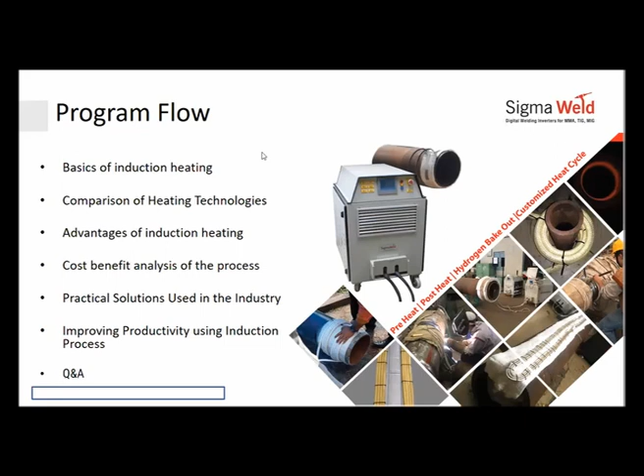So what is induction heating? Induction heating is an accurate, fast, repeatable, efficient, non-contact technique for heating metals or any other electrically conductive material. Simply put, if you remember your childhood days when you played with a magnet, it's just like that. If you had a magnet in your hand, as long as there was no metal around it...

Let's dig into the history of induction heating. Michael Faraday is generally credited with the discovery of the fundamental principles underlying induction heating.

Initially, it was a problem child. Everybody was doing research on induction to find out how to reduce its effects. The effects were causing problems in devices like transformers, motors, and generators, where they had a lot of winding of electrical cable on top of a metal, and they were causing other parts to get heated, making the overall process inefficient. So a lot of focus early on in the 1790s and 1830s was largely on the reduction of impact of induction rather than use of it.

Then they realized it has so much power and opportunity that they could use it to do many things, including melting metals. So the initial start of induction was around 1916, where they began using induction for the possibility of metal melting. Early applications were melting small charges of metal using spark gap oscillators.

Spark gap oscillators - most of you would remember your age-old radios or transformers, and you could have seen a bulb kind of device there. That was a spark gap oscillator, and vacuum tubes. They also used induction heating to heat metallic elements from vacuum tubes, to drive off absorbed gases prior to sealing the vacuum tube. Again, you could heat it with non-contact from outside, and thereby do that without having anything get inside itself.

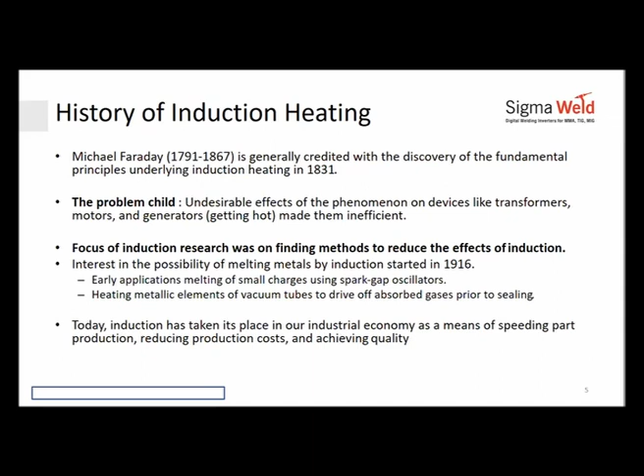It all began with Faraday's law. So what was Faraday's law, and what does it say? Basically, magnetic flux exists, and in Faraday's experiment, they realized that a steady magnetic flux doesn't do anything.

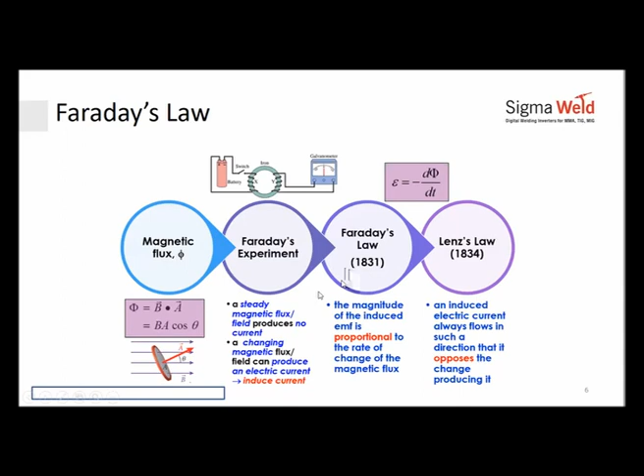But if you kept changing the magnetic flux, it had a very positive impact of inducing an electric current on the object. The magnitude of the induced EMF, electromotive force, is proportional to the rate of change of magnetic flux. Now what this meant was frequency, and what this means is the current induced. So this is just to explain the key factors that go into induction and how it all came about.

If I had to explain this in a very simple term, most of us today have seen an induction cooktop, so I'll take that example to explain the principle of induction heating. You would have an induction coil placed below the surface, and on top you would have a glass or toughened surface or plastic surface, which is non-metallic. You would have the coil designated - this is the coil, which is copper wound in circles over here.

These inductive coils in the cooktops typically operate at frequencies of about 20 to 40 kilohertz, which means that is the frequency at which the magnetic field will also be generated.

These are the blue lines that you can see the magnetic field being generated. Now, if you switched on your cooktop and put your hand on it without any metals on your finger, you would not feel any heat, right? Because your hand doesn't conduct, there is no impact of magnetic field on your hand.

But if you put a metallic vessel on top of it, when you added water or anything to it, the vessel would now be in the path of the magnetic field. Now, this magnetic field, which is an alternating magnetic field, would induce current in the metal. And this orange zone shows that the metal will start getting heated up quickly. And since the metal starts getting heated up, it conducts the heat onto the object inside the vessel, that is your water, milk, tea, whatever you wanted to boil or cook. That's the basic principle of induction.

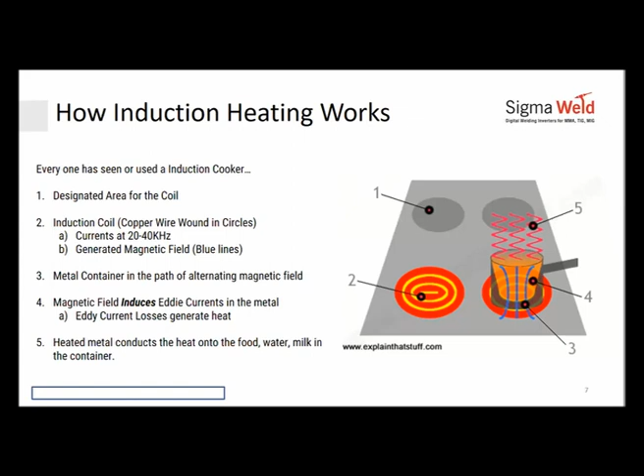Important things to consider when we look at induction. One of the most important parameters is power. Now, power is current times voltage. So which current are we talking about? The current that is flowing through the coil that is generated, the alternating current. That determines the intensity of the magnetic field generated.

The frequency of operation of the equipment decides the length of the magnetic field, or the depth. So the higher the frequency, the shallower the penetration or the heating effect. So if you want to do case hardening, typically, you would be touching only the surface. When I talk about high frequencies, I'm talking about anything over 100 kilohertz. Above 450 kilohertz, you would consider it to be radio frequency. And that would give you really fine case depths.

If you lowered the frequency, you would see more deep penetration, or more heat going internally. And when you do it really low frequency, you would be doing something like forging, where you want to heat the billet completely inside out, or you want to do through hardening. At that time, you would be operating your induction heaters at a very low frequency, maybe 150 hertz, 500 hertz to about 1 kilohertz. That would help you do that.

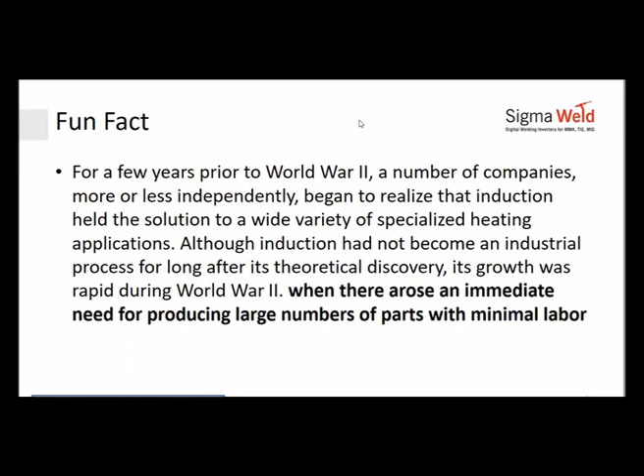I guess I wouldn't call this World War III, but we are in a situation right now which is very similar, where the time available in the year is going to be much lesser than the amount of work we would have on our hands to complete, which has begun as of now. So induction can play a good role for you to speed up things as we move along.

Now let us understand the kind of application range that you can do with induction heating. So here are a few examples. Hardening is one of them, whether it's case hardening or through hardening, you can do hardening with induction.

You can do annealing with induction, bright, black, wire annealing. You would have normalizing, if you wanted to take the material to a temperature just below Curie point and hold it there so that whatever stresses were there were relieved.

Then you could do stress relieving, pan bottom brazing. All the vessels and utensils you use are also annealed so they can be shaped without cracking. Pan bottom brazing is used for all the pressure cookers you use, which are either impact bonded or pan bottom brazed.

There is a sandwich brazing between the inner vessel on which you put the food and the base which goes on top of your stove or induction cooktop. A flat layer brazed in between both of them is a layer of brass and alloys which forms a permanent bond between the two layers. That's pan bottom brazing or impact bonding.

Then you have resin bonding. Every time you use pipes, oil and gas pipelines going underground need to be coated with a layer. If you see that black layer, that's resin bonding.

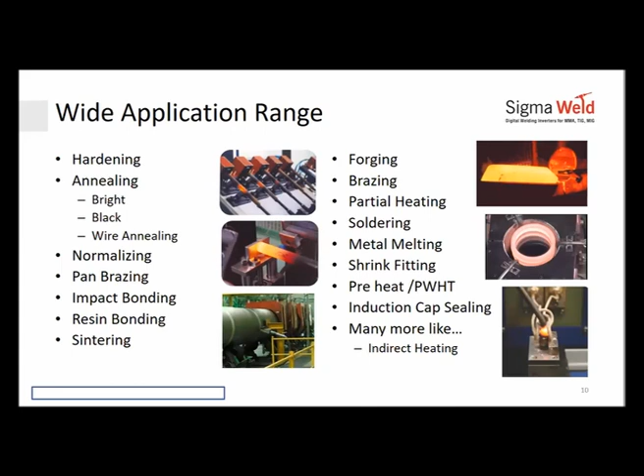Some of the features you may not be very clear are induction-based, but I'll show you how.

One example is induction cap sealing. If you've been taking any medicines, nutraceuticals, lube oil, lubricants, or food packing like Bournvitas or Horlicks - anything that has an aluminum foil on it has been sealed with induction to a large extent. In induction, what happens is it's an indirect heating.

We heat the aluminum foil under a tunnel. When it gets heated, it melts the wax on top of the foil and releases it from the board that is holding it. Because it's pressed firmly against the bottle, the soft poly layer below the aluminum forms a hermetic seal. Induction speeds here can be as high as 300 bottles a minute.

You can look at something like a carbon water filter cartridge, which is there in your water purifiers, whether RO or whatever you look at. This is a carbon filter, but on top and bottom they need to put plastic caps. Now, how do you put a plastic cap and let it stick there?

They have to do a hot melt glue. How do you apply glue and put this together at the speeds of production you're looking at, maybe 120, 200 pieces a minute? It's very difficult to do with a general process.

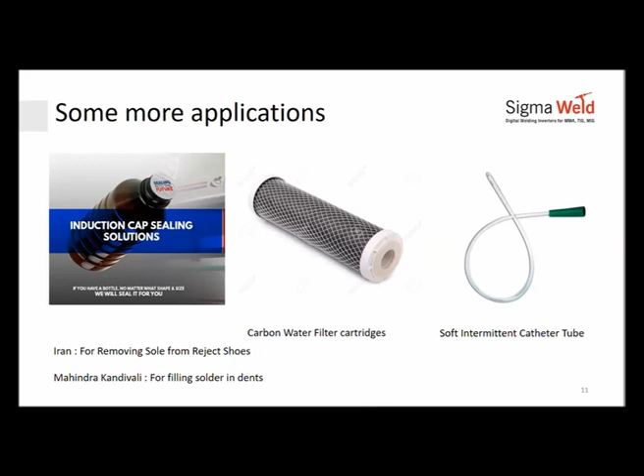Okay, so moving along, if we have to compare between the technologies - can I have a quick poll in the meantime so that we see everybody is still there? Can we look at this before we do the comparison?

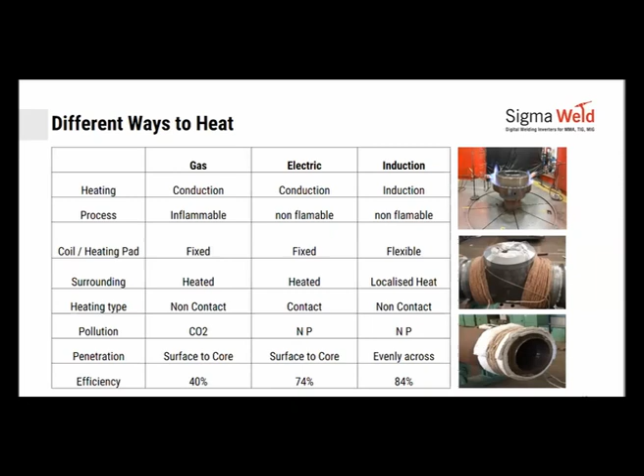Different ways to heat. At this moment, you may be using one of these three methodologies to heat: gas, electric, or induction.

If the heating process is gas, it is conductive - you are throwing flames onto the job, the job is rotating, and it's heating through conduction. With electrical, similarly, you wind the job on top, the nichrome wire gets heated, and the heat from the nichrome wire is then conducted onto the job. To avoid any loss of heat, we then wrap this with a layer of Cerawool.

In induction, the heat is not actually conducted, it is produced into the metal directly. The gas process is flammable, this process is not flammable, and even induction is not flammable. So from environment, health and safety point of view, or shop floor compliance and safety norms, both these processes are much safer.

In terms of coil heating pads versus gas-based heating or nichrome wires, the flexibility available on the coil or heating pads is less - you have a fixed shape along which the flame is thrown, the nichrome wire is wound, or the pads are placed. Whereas in induction, you have a flexible coil, so you have the flexibility of wrapping it around any shape you like.

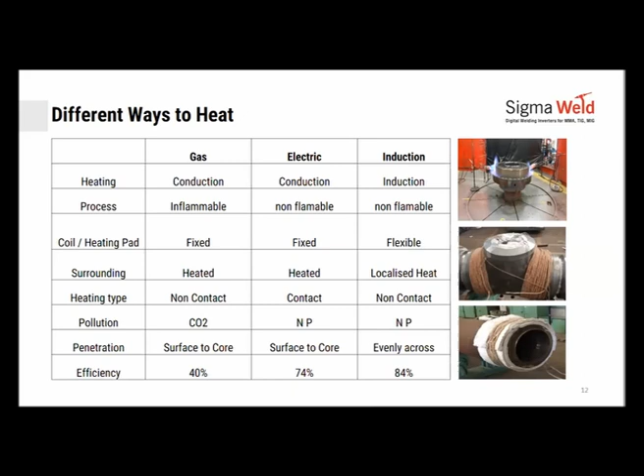Process advantages of induction: as we've seen, it's a very clean technology, no pollution, no flames. It's much faster and more consistent heating. As the heat is directly induced into the metal, there is no conduction loss. It's a non-skilled process - once you put it on and press a button, it heats on its own, repeating the same each time, with no skill dependency. It's highly efficient, and localized heating is possible - if you wanted to heat a very small portion of a large component, you could do that and take it up to normalizing temperatures or even beyond the Curie point.

Quick setup, so the coil doesn't get hot. The operator can place and remove the coil very comfortably without having to be worried about hurting himself. The welder can weld while the coil is in place, which is another advantage.

Your rotations can happen since it's non-contact. The welder can be welding while your heating is still on, and the heat is not impacting the welder. It's economic, because low power consumption reduces your cycle time, your overall setup plus heating time, and it's excellent for preheating.

We'll see a lot of examples following through, and it's also pretty much required for the P91 material.

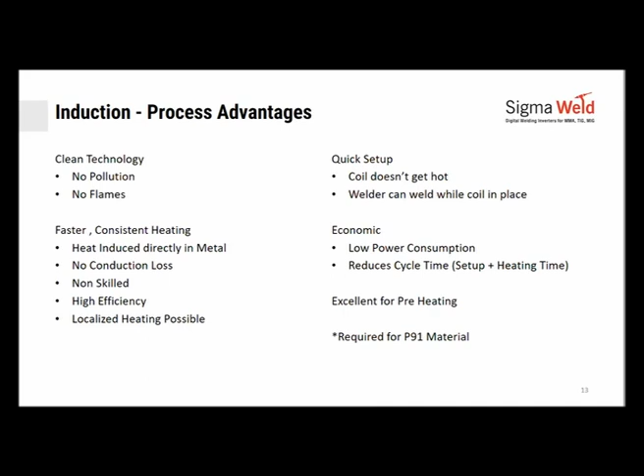How does it work? Here's a block diagram of an induction heating equipment or controller. You would put in a temperature profile that you wanted to achieve. Say, for example, you want a ramp rate of 50 degrees and you want to do about 600 degrees of peak temperature. You would set that on your profiler, which has an error amplifier, an amplifier, an inverter, and then the sensors.

This is your actual job, the pipe. The spiral thing here is your inductive coil, and it would have a thermocouple or sensor placed onto the pipe. This feedback would go to the amplifier, and it would check whether your desired temperature has been achieved or not. If not, it would amplify and allow more power to be pumped to the job. If it has already reached the rate you wanted, it would reduce or hold on to it. So this is the kind of feedback involved.

It works in a very closed loop. You can have a temperature feedback system, and you can also work in open loop. An accurate PID control loop has been added, giving much better control on the temperature profile. For inner loop power control, a PI loop has been added, so accuracies are under 10 degrees temperature difference between the outer and inner surface.

We did certain experiments on plates and pipes as thick as 250mm, and found that even over a period of time, the temperature difference keeps going down and stays below 10 degrees. On smaller components or lower thicknesses, we can achieve a very good temperature gradient.

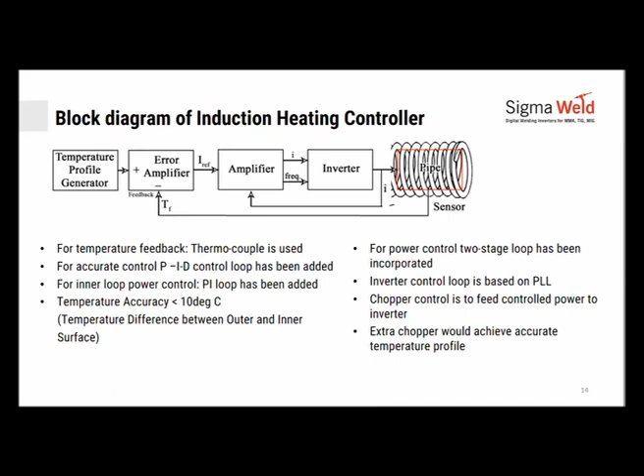For power control, a two-stage loop has been incorporated so you have much better control. The inverter loop is in PLL, and chopper control is also available for inverting. So there are a lot of controls on the power electronics side, which give you the accurate temperature profile that you wanted.

What do you expect from an induction heating system for pre-weld and post-weld applications? You expect the equipment to cater to most of your production line needs without replacing the coil head. So as somebody was asking, if you had a pipe, an elbow, or a nozzle-to-flange joint which was 18 inches today, and tomorrow it was to be 24 inches, the ease of doing both without having to change the coil would be required.

It should compensate for load variation, thickness of pipe, diameter, surface to core temperatures, ease of process setting, wide range of heating profile, and it should consume less power.

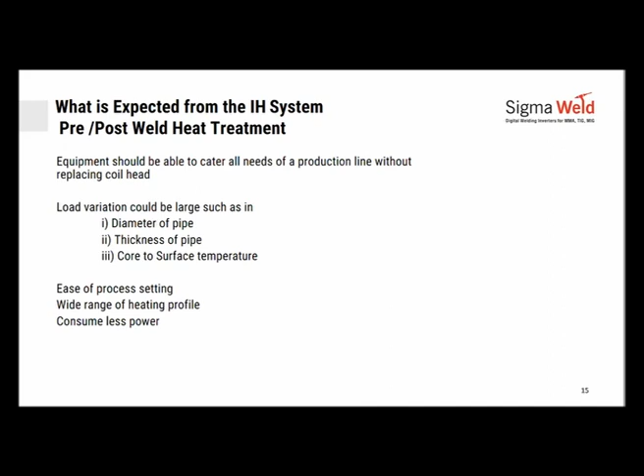The Sigmatherm pre-weld, post-weld heat treatment induction heaters we are making come with air-cooled and water-cooled coils. You can decouple coils, meaning if you had a larger job, you could have multiple coils on one job, or multiple machines used on the same job. More coils can be decoupled to cover more area, and we will show you some examples of that.

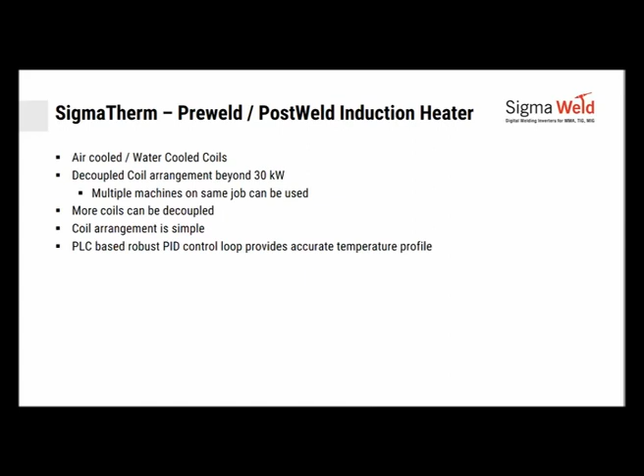And since it's a PLC based robust PID loop, it gives very accurate temperature control profiles.

A typical temperature profile required for preheating and post heating is something like this. Before you weld, you want to preheat the job, so you preheat up to 150 to 200 degrees. During welding, you have to maintain the interpass temperature under 250 or 300 degrees typically, and then you should have a slow cooling rate or necessary soaking for post heat for some time.

Wait, complete your RT, and then go in for a post heat cycle, which has a heating rate of 80 to 120 degrees per hour depending on thickness. Then you achieve your 760 degrees, plus or minus 10 degrees allowed, and hold it there for a period of 2 to 4 hours.

We have done some trials where we held it for as long as 8 to 10 hours to ensure proper normalizing and proper heat distribution all across the thickness.

Cooling rates are allowed at about 100 to 150 degrees per hour, and below 400 degrees, free cooling or air cooling is allowed, no forced cooling, only natural cooling. This is the profile that needs to be achieved, and the same profile can be easily programmed on the equipment.

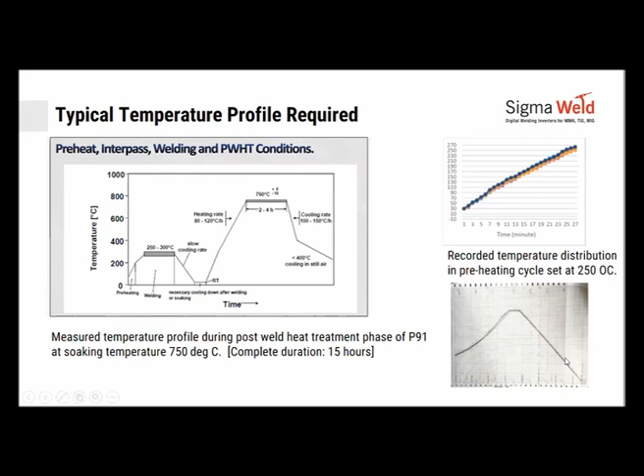Similarly, if you look at this chart here, which was produced during the post-heat cycle, the cycle was completed in 15 hours. You could have a gradual ramp up as programmed, hold the temperature there for a couple of hours, and then a gradual cooling down, bringing it to a nominal temperature and letting it cool.

The modes of operation available on the equipment are manual heating, where you could set the power and start/stop on a timer basis. You could set it on preheating, where you say you want to preheat to a particular temperature, and then give a temperature feedback to the equipment—a thermocouple, a stitch type thermocouple, a touch type thermocouple, or an optical thermocouple, anything is possible.

You need to have a temperature feedback onto the system, and then you could heat to that temperature and hold it there throughout your welding cycle. You could monitor your interpass temperatures, and it could give you an alarm if you're going beyond your interpass, telling you to stop welding. It allows you to do the complete PWHT cycle we discussed, program your hydrogen bakeout cycle, and also gives you the flexibility to customize your own cycle.

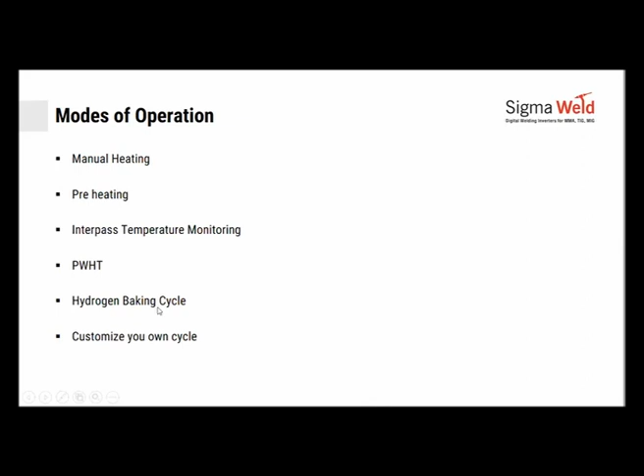We did a very critical job recently for BARC along with Godrej, where we had to control the temperature very closely under 40 degrees on a 70 thick vessel. On the bottom of the vessel is where we had to do the normalizing of the temperature, and the entire program went on—it was a special customized program we did to ensure minimum difference, and it ran for more than 36 hours. This cycle has been proven; once programmed, it's repeatable down to that level.

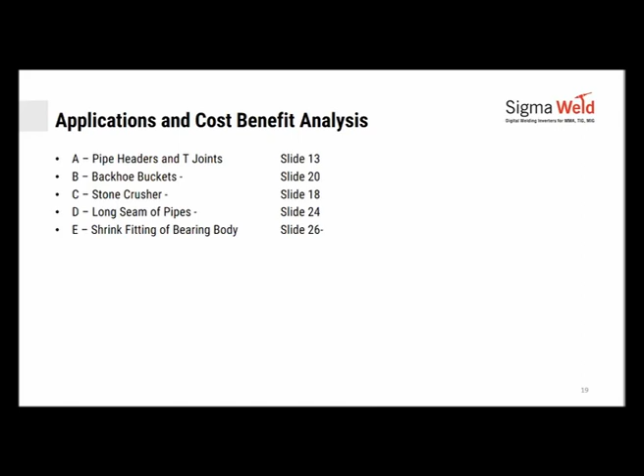So a few of the applications we'll be discussing today: pipe headers, T-joints, preheating, post-heating, backhoe buckets—you could see the buckets being preheated—stone crushers, long seams of pipes, and shrink fitting of bearing bodies. We'll also see a couple of other components.

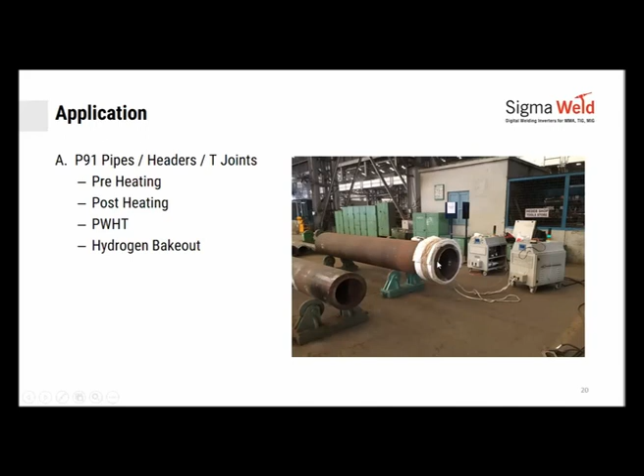P91 pipes, headers, and T-joints all need to be preheated, post-heated, PWHT'd, and hydrogen bakeout carried out—everything has to be done. This is the kind of setup: you could see an equipment here, the coil being wound on the edge of the header, and once switched on, it goes through heating, which right now is on and would have taken the temperature to the desired level.

Typical setup for preheating—this is a huge elbow and flange. Here you have to preheat up to 250 degrees, thicknesses are about 70 mm or so. If you were to do this with gas or an electrical pad, the time required to wind it on an electrical pad alone would be close to 2.5 hours, given the kind of curves involved. Whereas with induction, it takes about 10 to 15 minutes to set up—just put the ferrule, wind the coil like a rope, fit it, and start.

The root runs or TIG welding being done, subsequent runs of SMAW or arc welding being done, the coil stays in place and it's not a problem. You could keep welding while the coil is there, maintaining and monitoring your interpass temperatures.

Similarly, here you could see a bigger vessel where a long seam needs to be welded. You could have a prefixed blanket placed there—imagine the ease, the blanket never gets hot. You place the blanket here and leave it for 20 minutes. This is a 50 thick vessel, about 3 meters or 2.5 meters long, and it would have heated up in about 20 to 25 minutes, up to 200 degrees. Remove the blanket, start your welding, not a problem.

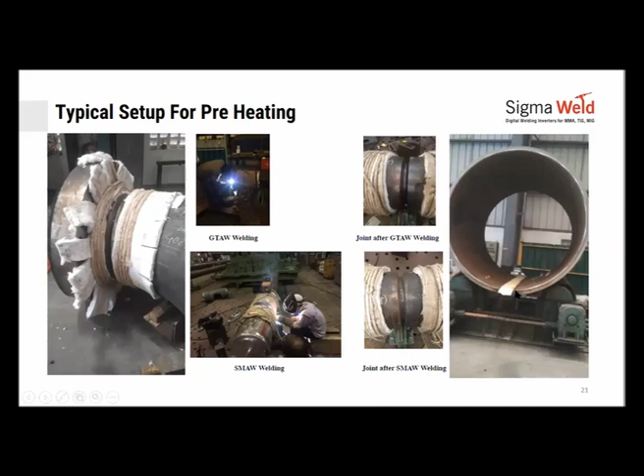Here is a comparison with a gas-based system. These were trials done for one of our customers. If you look at this pipe, it needs to be cladded from inside, so the temperature needs to be ensured on the inside is correct. The temperature to be achieved was about 240 degrees. The wall thickness is about 25 mm. As you can see, the ID is 117, OD is 167, so wall thickness is about 25 mm. This is the burner that was used.

While the job is rotating and the burner is at a fixed position, when they tried to heat the zone of 400 millimeters, they were able to achieve 240 degrees in 20 minutes. But if you see the burner hitting at one time, you will have bright hot spots in some places, and not so hot, or equivalent temperature of 240 degrees, all across the surface.

However, in induction, we inserted the coil on the inside. This is the inductive coil, and the job is still rotating. While the coil is placed inside the heating zone of 400 mm, you are able to achieve the same job in 8 minutes. While this is happening, the operator cannot approach nearby because of the heat around. Here, the operator has no difficulty monitoring the temperature from the top or inside. And the ease of setup, putting the coil in and out is as simple as putting a rod in and bringing it out. No difficulty, as this doesn't get heated itself.

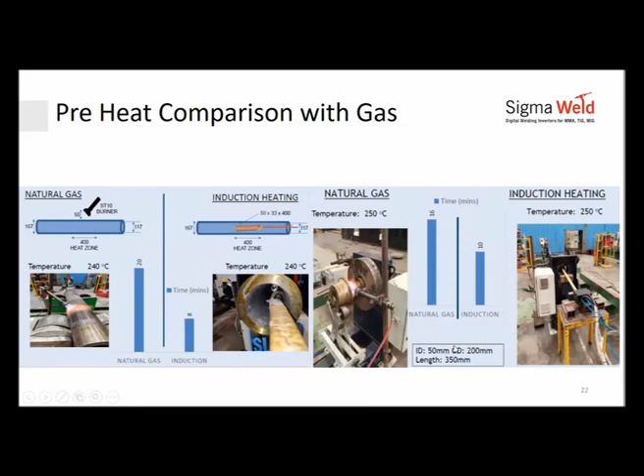8 minutes to 20 minutes - this is the kind of setup or running time saving. Again, if you look at the OD, here is a very heavy, thick component being preheated. With gas, it took about 16 minutes to bring in the temperatures on the surface, with no way to measure it on the inside. However, here, since the heating is happening from inside, when you measure on the surface, it's ensured that the heating inside is equivalent or above that temperature. Again, assured much lesser time, much better accuracy of heating.

This is another trial done for equipment in use for pipe to elbow welding. During welding for this material, P91, the preheated temperature was about 150 degrees, achieved after 15 minutes. The job thickness is 72 millimeters. Achieved in 15 minutes, 150 degrees, they could start welding. All thermocouples around, at the 12 o'clock, 3 o'clock, 6 o'clock, 9 o'clock positions, gave more or less consistent readings between 1 to 2 degrees.

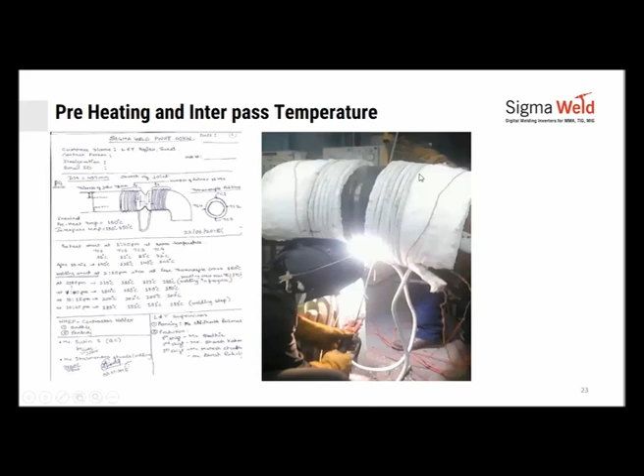They started the welding, and during welding, as the temperature rises, they stopped the welding when they could. The time required to preheat was very less, hardly 15 minutes. Setup time on something like this would be not more than 15 minutes. As you can see, you have to just put the Cerawool on the job. These are the induction coils. You could wind it, take a loop around, wind on the other side, take it back to the equipment, connect it, press start. As simple as that.

Similar job here being done for post heat. We had to achieve a temperature of 750 degrees. As you can see, it's achieved the 750 degrees after the ramp. It is undergoing soaking for about 100 minutes, and then it will come down to 300 degrees, again in a controlled slope of 40 to 50 degrees per hour. This is the way the job is wound - this is a blanket, the Cerawool blanket, and along the top of which they have wound the induction coil. You can see the profile of heat generated on the inside.

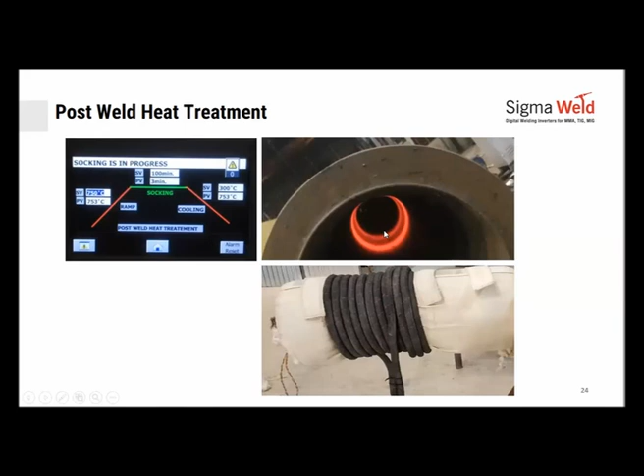Now imagine you are doing a post-weld heat treatment job on a power plant piping station. The job itself is a couple of 50, 60 meters above the ground, so you are standing at this height. Now you have a joint like this, in between two pipes already placed. Try imagining putting anything here other than induction - try it with, say, a blanket for example. The amount of time and effort required for the operator to fit in the blanket or the electrical pads there and then wind it over would be much higher. A lot of time, a lot of difficulty to do that.

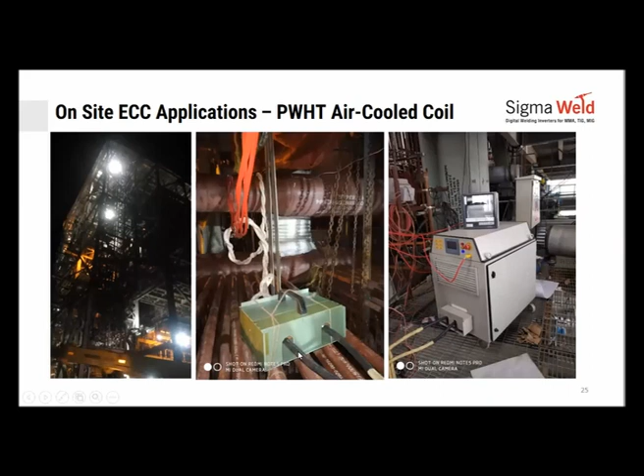Here, it becomes much easier. Put the Cerawool on top of the job first, then wind the coil and bring it to the junction box. The junction box and the equipment could be as far as 30 meters away. The equipment is 30 meters away from the joint - the coil itself is 30 meters, and you have a 15 to 30 meter interconnection cable. So this kind of flexibility is available.

Another very critical application for aerospace right now. This material is non-magnetic and has a typical challenge where it needs to jump from 650 to 850 degrees in under 2 minutes. Otherwise, the heat treatment won't be correct, or it will not reach its desired solution.

The way to do this was in two steps. We built a portable oven around the job itself, wound a water cooled coil and preheated it up to 650 degrees, holding it there for an hour so the entire job is at 650. This job is then immersed into an existing furnace, already fired up at about 1100 degrees. That's the only way to achieve this solution. Otherwise it's not possible, and this was really tricky to achieve the desired results.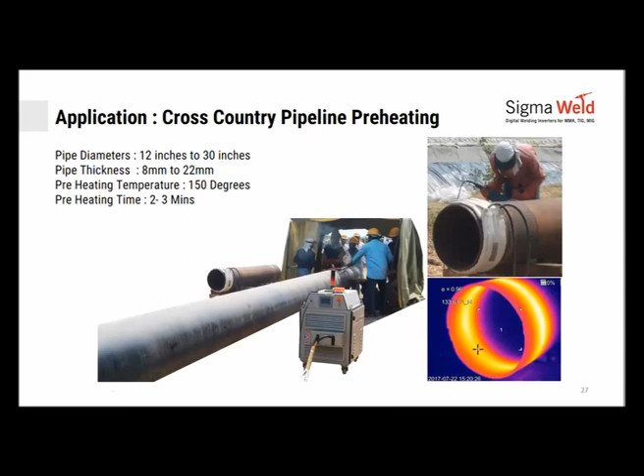The other way around is using gas to preheat the surfaces, which usually doesn't give equal heat, and also risks overheating and ruining your coating on the other side. This has been successfully executed on many GAIL projects across India. More than 50 equipments of this nature are working in India and now also in the Middle East.

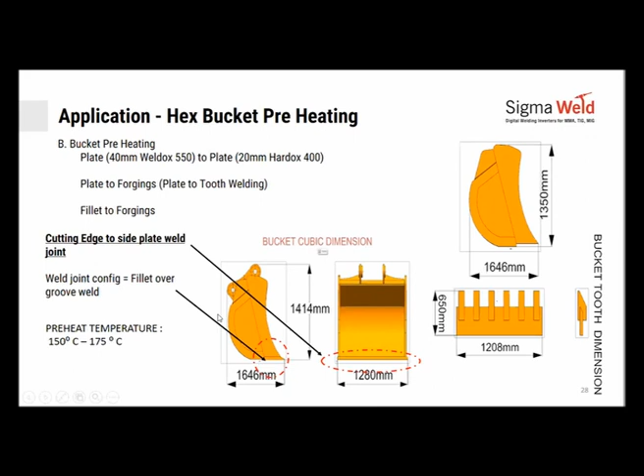Pretty much a standard application for pipeline preheating. Again, if you look at the Hex bucket, it's got about a 20mm to 40mm thick plate that needs to be welded here. The tooth that goes on each side is about 60mm thick. Materials are Weldox and Hardox here, and the challenge is to preheat them above 205 degrees.

The way to do it with induction: we place the coil here, a simple blanket, a Cerawool blanket below it, and you could achieve 205 degrees in under 5 minutes. Again, the operator could simply pick the coil, put it on the side, and start welding.

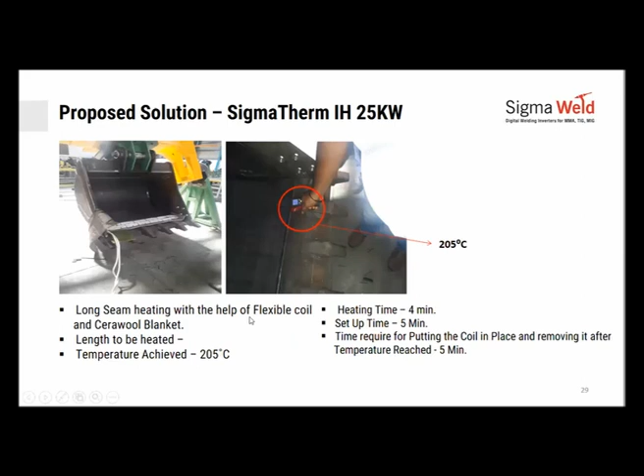If you had to do this with the help of a gas-based furnace, you can imagine this would take at least 20 to 25 minutes to preheat. To remove the gas burner from there and get the welder to start welding would be another challenge.

When they are welding the corner teeth, they need to preheat both of them at the same time to avoid distortion, and welding also happens in parallel. To do that, with the same equipment, one coil has been made and split, and a second coil has been wound here and goes back to the equipment. Both joints have the same thickness, same geometry, 40 plus 60mm.

We were able to achieve 310 degrees temperature in about 10 to 12 minutes. Setup time under 5 minutes, 10 minutes to begin with. Again, in 20 minutes your job is out. Time taken to put the coil in place, remove it, and start welding is under 5 minutes.

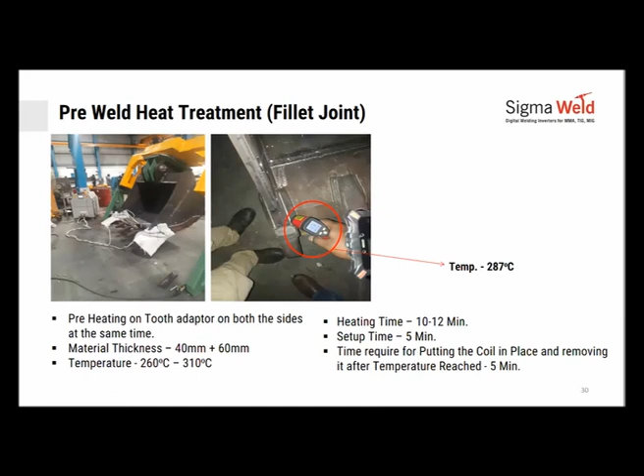If you were to do gas-based heating, 10 minutes would be the setup time. With induction, it's 2 to 5 minutes setup time. Heating time is 20 to 30 minutes in a gas-based system, whereas 4 to 5 minutes on the induction heater. On safety, the gas flame is always on, so somebody has to be careful, and the surrounding area gets hot. Here, no flammable gases need to be handled on the shop floor, making it extremely safe, as we shared earlier.

Cost saving: gas used over 30 minutes versus electricity used over 4 minutes. Electricity used over 4 minutes, even at about 15 to 20 kilowatts, means 20 units per hour. That works out to about 1.5 units for those 4 minutes, which is about 10 to 14 rupees of electricity consumed. That's the cost of running this back to back on the job.

If you look at the time saving, this is where our focus will be more and more as you move along. Time today is going to be more valuable than money, because you will have lesser time to produce more.

Say you did 4 joints a shift, averaging 25 minutes per joint with gas-based heating — 4 joints would take 100 minutes. With induction, it takes 5 minutes per joint for preheating, so 4 joints would take 20 minutes. That's 100 minutes for 4 joints with gas versus 20 minutes for 4 joints with induction — an 80 minute per shift saving you can convert into productive time and get more jobs done, with the same manpower and same equipment.

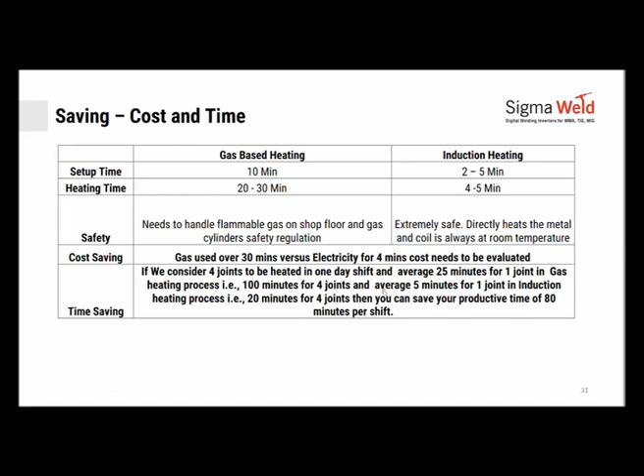This is another classic case where we did preheating of pipes before submerged arc welding for the long seam, and then did post-heating as well. This is a 12-meter long pipe, 25 mm thick, and this is a 6-meter long pipe, about 65 millimeters thick. These two were done with this equipment — and this is another one.

Before induction, we had a huge gas bank here, which used to be maintained to continuously keep the pipe heated to about 400 degrees post-welding, and pre-welding to about 200 to 250 degrees.

This is a classic case where we checked that their welding time per length was about 20 to 25 minutes. So we calculated the power in a way that one pipe could be preheated while the other is being welded, so that your more expensive equipment — the column boom and the welding happening — doesn't stay idle.

The minute you finished welding the first job, you put it onto the next station, pick the preheated pipe from before and put it onto the welding station. Put a fresh pipe which is down, put the coil on top of that pipe, and start your process again. In the next 25 minutes, this pipe will be ready to weld with the same preheating temperature and the same consistency.

The time taken for the operator to pick and place this blanket is nothing — two people could pick it up, put it down, pick it and put it back up. The blankets are not getting hot — mind you, the blankets don't get hot. This is a blanket stitched with ceramic wool in between, so there is no heat on the surface of this blanket.

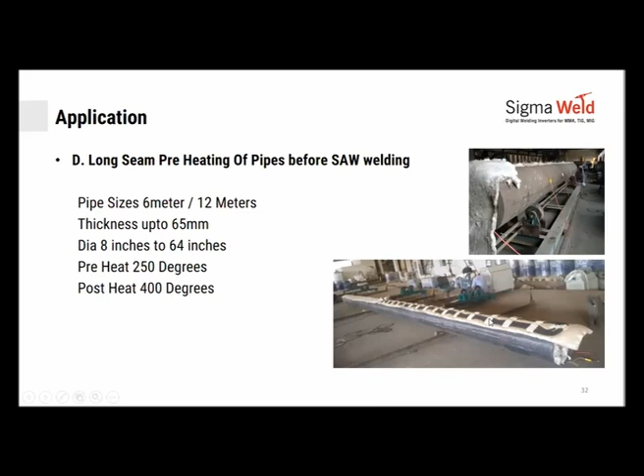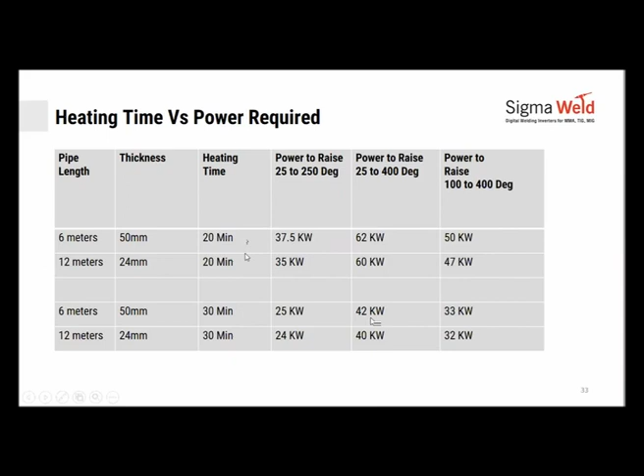We did calculations for them for preheating and post-heating, and realized that a 40 kilowatt equipment was good enough for preheating in 20 minutes. For post-heating, they needed about a 60 kilowatt equipment to heat in 20 minutes. So, 40 kilowatt for preheating in 20 minutes and 60 kilowatt for post-heating in 20 minutes.

Another classic example is bearing to bearing housing fitting. This is the last example I'll take — we're almost out of time, but bear with me for 5 more minutes and then we'll take your questions. Bearing housing to bearing shrink fitting is a classic example: thicknesses are about 60 millimeters, diameters range from 8 inches to 64 inches.

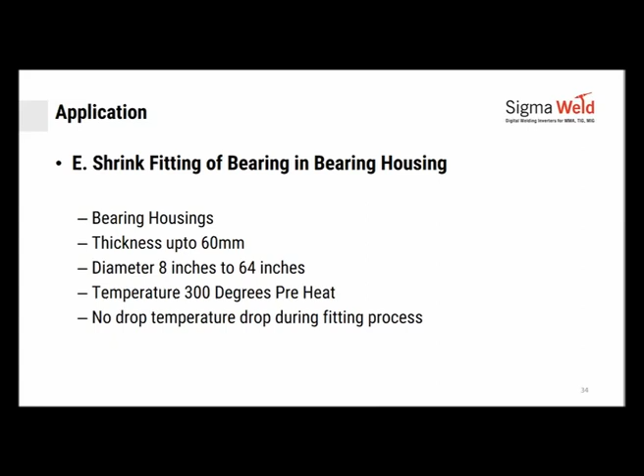For shrink fitting, you need a temperature of about 300 degrees. In shrink fitting, when you preheat the surface, it expands, so you can put the cold part inside and fit it on top — there should not be any drop in temperature during the fitting process, otherwise you'll have a half-stuck bearing or an incomplete weld. This is the housing that was there, and the bearing had to be placed inside. They are very close fit products. This is how we wound the induction coil on top of the bearing housing.

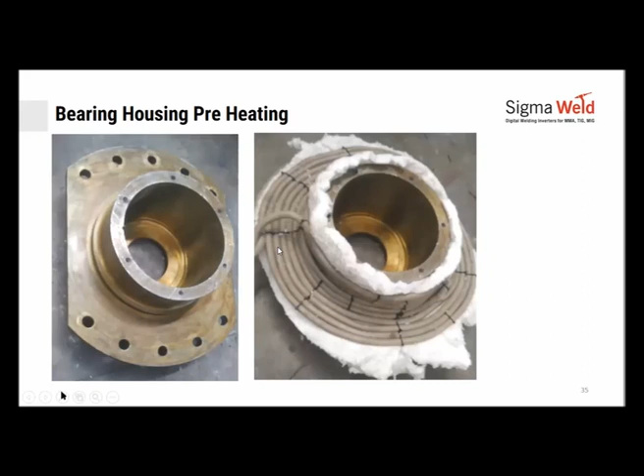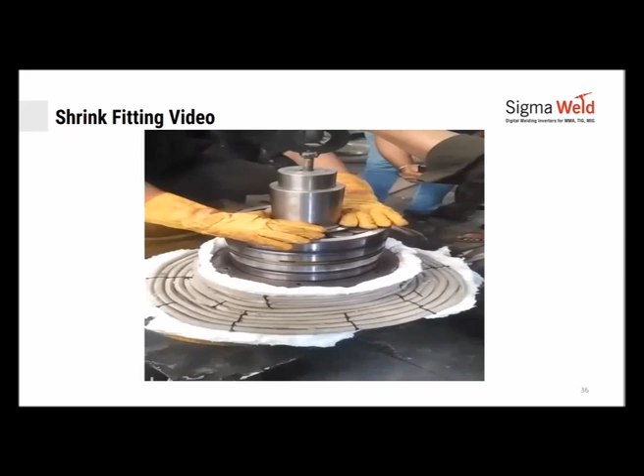I'll share a quick video with you to show how easy the process was. It took merely about 6 minutes to reach the temperature. Look at the ease with which the operator is now fitting the bearing inside the housing — no rush, he's doing it at his own time because the bearing housing is always going to remain at that temperature. He is not being pushed or rushed into anything.

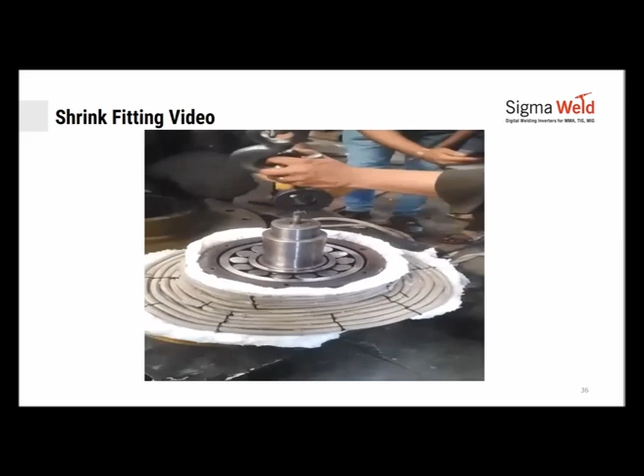Extremely safe. What is the alternative to this? It's dipping this bearing housing in an oil bath for 6 hours. And if you had to do only one, or you had to do 10 bearings, you would still have to fire up your oil bath, right?

It would take 6 hours for the oil bath to reach its temperature. Here, you could do one job at a time. You could do one job in a day, do it for 6 minutes and put it aside. You don't need to fire up the oil bath for 6 hours to do anything. You could do it in 6 minutes, complete your job - dry, quick, easy and clean method.

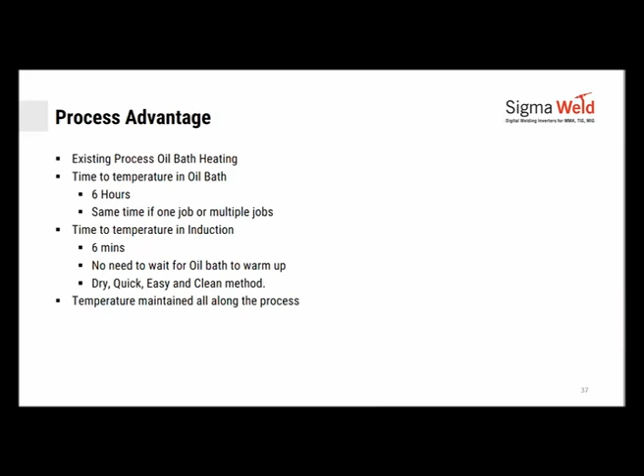No need to wait for the oil bath to warm up. Temperature is maintained all along the process, so the operator is not rushed and he can do the job very comfortably.

Again, to repeat the advantages of PWHT: quick heating, increased productivity, the surrounding area doesn't get heated, the coil is easy and safe to handle, no fire or flame due to induction heaters. It's a non-contact process, so you can be very safe and have a reliable heating process.

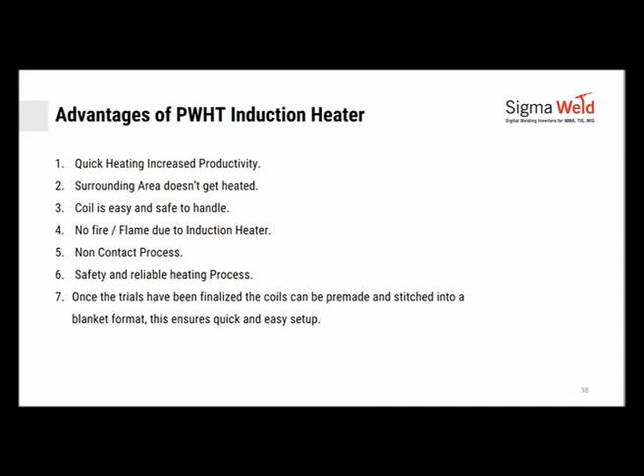Once trials have been finalized, the coil can be pre-made and stitched into a blanket, as you saw, so it ensures quick and easy setup. Okay, I have come to the end of our talk on preheat and post-heat. I hope I have been able to derive some value in what you saw.